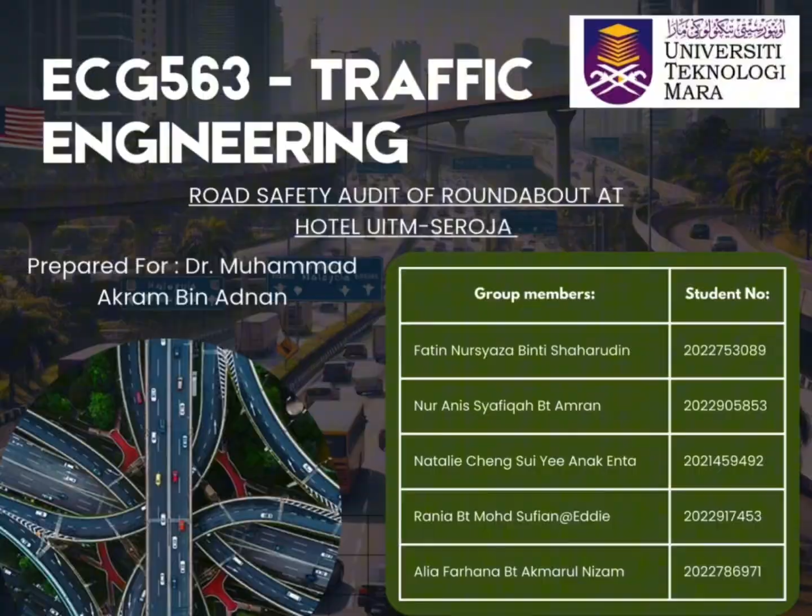Road accidents have been recognized as one of the major problems globally. They have significant impacts on society, the economy, and the progress of a country. Accidents often occur due to traffic conflicts between vehicles, causing delays and congestion.

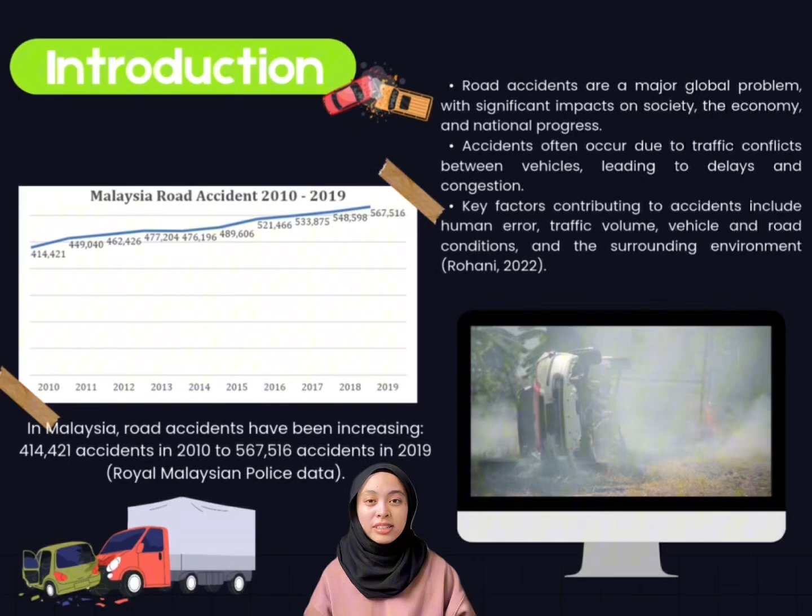According to the research paper entitled Road Traffic Accidents in Malaysia Trends by Rohani Kamaruddin, factors such as human error, traffic volume, vehicle and road conditions, and the surrounding environment play a key role in driving behavior, which can contribute to accidents. In Malaysia, the number of road accidents has been steadily increasing, and data from the Royal Malaysian Police (RMP) shows a rise from 414,421 accidents in 2010 to 567,516 in 2019, as shown in the graph.

Crashes at roundabouts are a significant issue due to factors such as poor design, insufficient traffic control, and high traffic conflicts. The lack of proper traffic management often leads to severe accidents and injuries at this location. For example, an incident from the research paper written by Nurliana Omar entitled Accident Analysis and Highway Safety at Simpang Rantai in 2014 ranked it first for road accidents in Malaysia.

This unsignalized intersection with the roundabout experienced frequent traffic conflicts, and the absence of adequate traffic control measures resulted in numerous crashes. The second case was in Iskandar Putri, Johor in 2023, where a 41-year-old man was killed when his sports car skidded and crashed at a roundabout.

Next, in Batu Caves, Selangor in 2023, a lorry collided with 11 cars and a motorcycle at a roundabout, injuring 3 people. And the last one, in Shah Alam, Selangor during 2018, a traffic accident at the roundabout near UiTM Shah Alam main gate involved a dump truck that appeared to have lost control and overturned, damaging nearby structures including a signboard and part of the landscape.

Research by the Malaysian Institute of Road Safety Research (MIROS) highlights that roundabouts can be especially dangerous due to unclear signs, poor design, and traffic management issues. These cases demonstrate the critical need for better design, traffic control, and management at roundabouts to reduce crashes and improve safety. Hence, this is why we need to conduct a road safety audit to identify potential hazards and implement preventive measures.

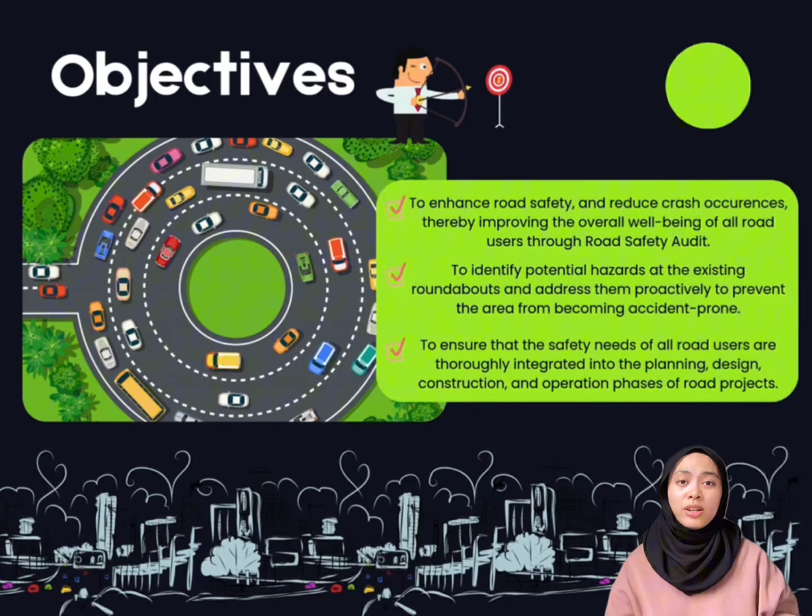My part of the road safety audit focuses on the geometry layout located near UiTM, between Hotel UiTM and Seroja area. This roundabout is designed with the following key components.

The entry and exit radius are critical for controlling vehicle speed at approach and departure points. The width allows for safe vehicular maneuvering around the central islands.

In addition to its vehicular design, this roundabout also incorporates several pedestrian-friendly and safety features. We can clearly see pedestrian walkways, rumble strips, splitter islands, and aprons. This geometry layout ensures that the roundabout is functional for both vehicles and pedestrians. However, during this audit, we'll examine if these features are performing optimally and if there's any room for safety improvement.

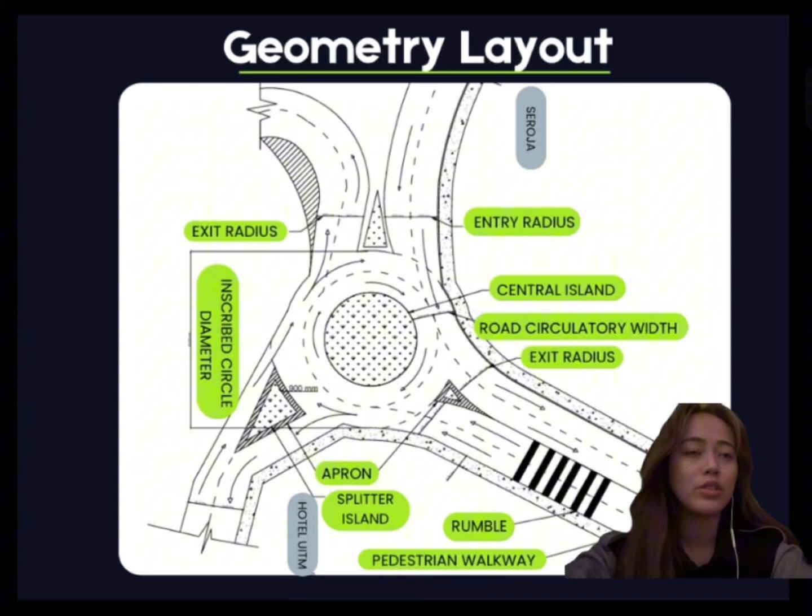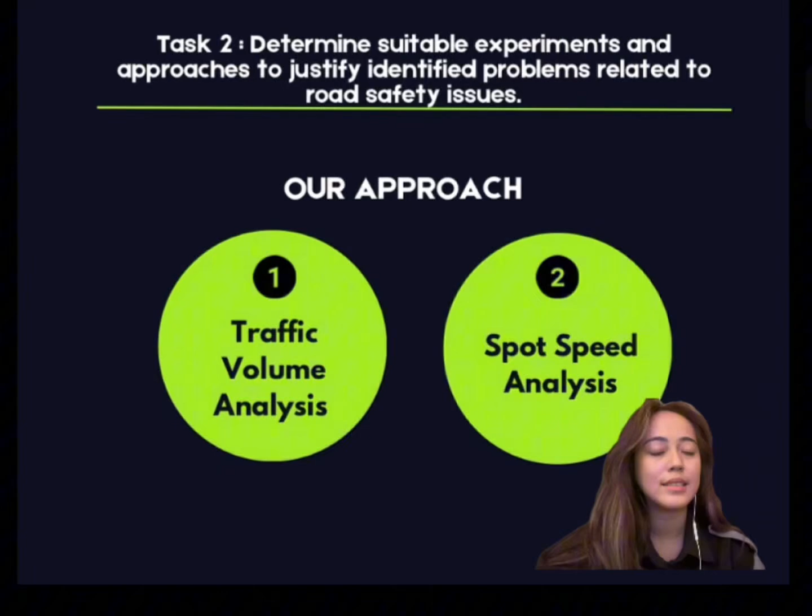Task 2 is to determine suitable experiments and approaches to justify identified problems related to road safety issues. Our approaches to this are, first, traffic volume analysis, and second, spot speed analysis. The first approach is traffic volume analysis.

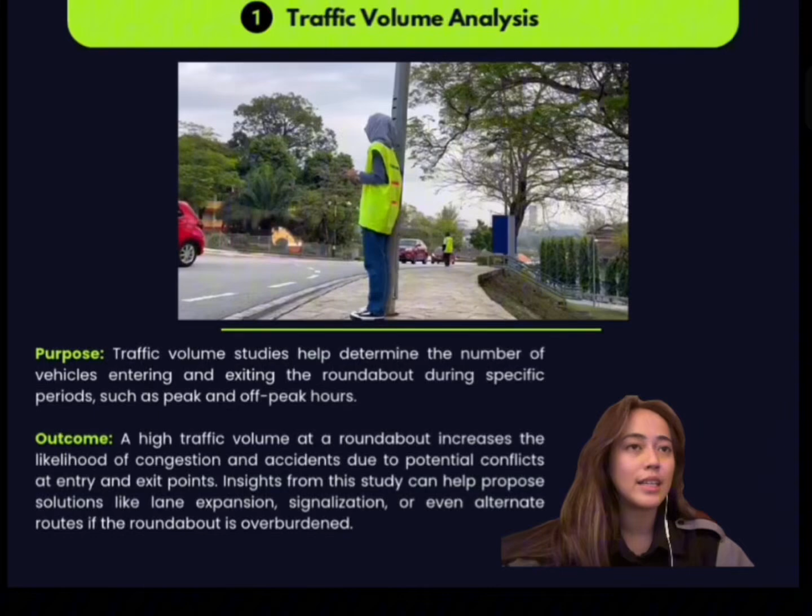So the purpose of this is to help determine the number of vehicles entering and exiting the roundabout during specific periods, off-peak and peak hours. Insights from these studies can help propose solutions like lane expansion, signalization, or alternate routes if the roundabout is overburdened.

Next is our spot speed analysis. This spot speed study captures the speeds at which vehicles approach, navigate, and exit the roundabout. The outcome of this is to understand speed patterns, aiding in recommending interventions like speed bumps, warning signs, and recalibrated design geometry to control vehicle speeds effectively.

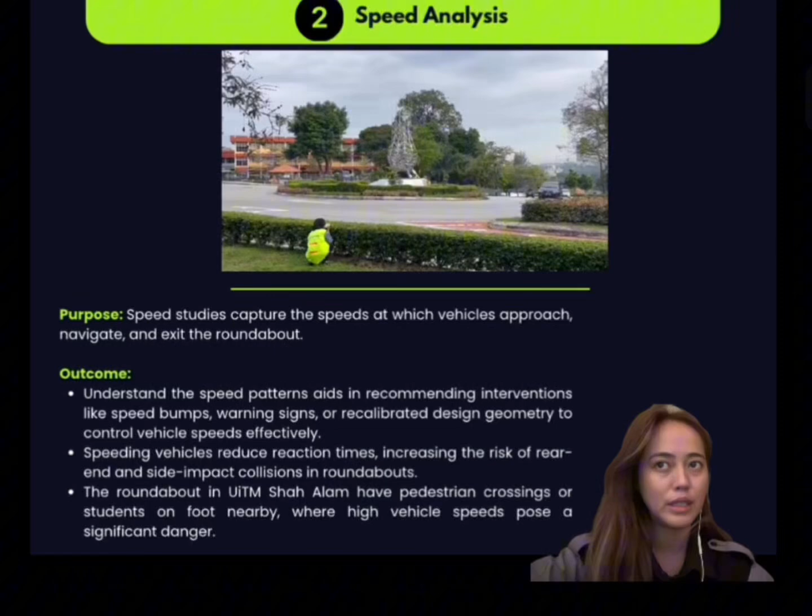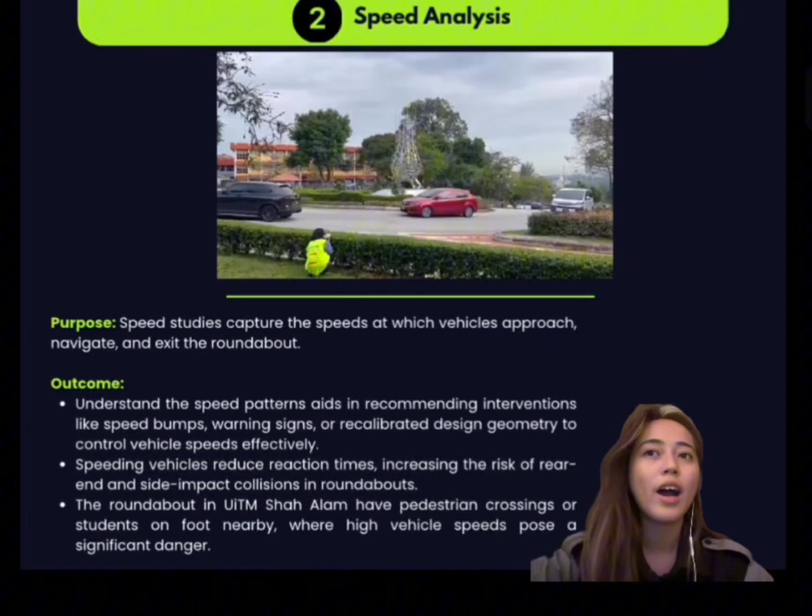Speeding vehicles reduce reaction times, increasing the risk of rear-end and side impact collisions in roundabouts. The roundabout in UiTM Shah Alam has pedestrian crossings and students on foot nearby, where high vehicle speeds pose a significant danger.

Good day everyone, my name is Fatin Nursyaza and today I'll be presenting on the topic of traffic volume analysis.

In this study, we utilized several apparatus to conduct the analysis effectively. This included a mechanical hand counter to record vehicles entering and exiting the roundabout, a digital distance measuring wheel roller to measure the dimensions of the roundabout, and a digital stopwatch to monitor timing in 5-minute intervals over a duration of 1 hour.

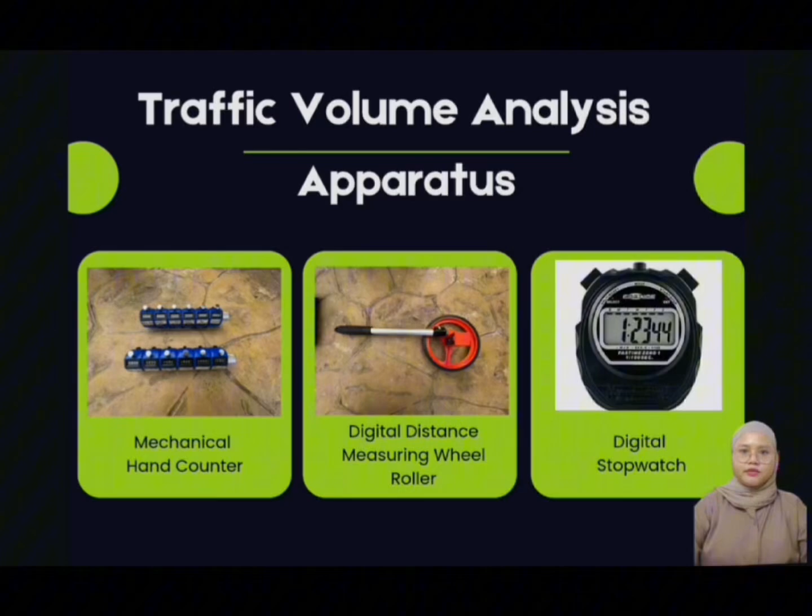The experiment was conducted at the roundabout near Kolej Seroja, UiTM Shah Alam. First, the dimensions of the intersection were measured, followed by labeling the direction of vehicle movement at the roundabout as D1, D2, D3, D4, D5, and D6.

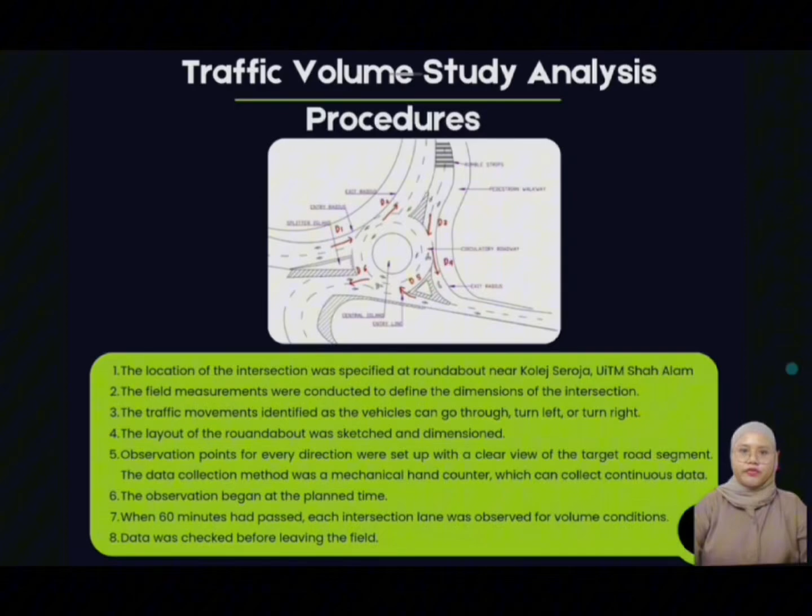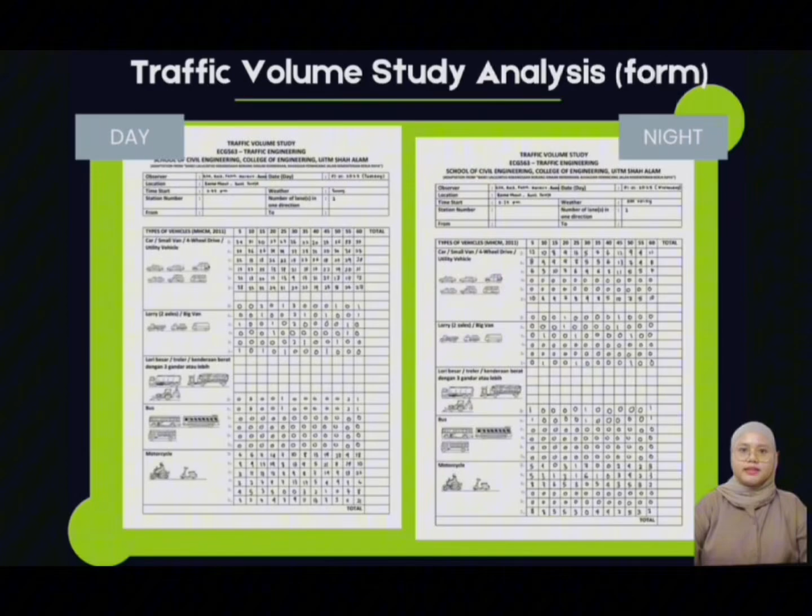Observation points were carefully set out for each direction to ensure a clear view of the designated road segments. Each direction was observed for a total duration of 60 minutes and traffic volume conditions were recorded. The data collection form was structured to differentiate between daytime and nighttime data, with the left-hand column presenting daytime observation and the right-hand column documenting nighttime observation.

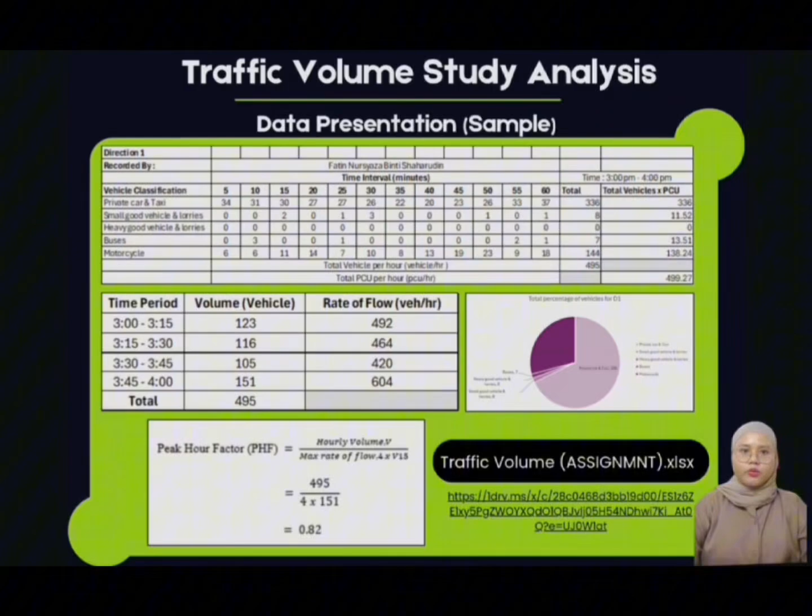Let us now move on to the presentation of the collected data. This slide displays a sample of the data collected during the day during the study. The complete data set along with calculations can be accessed via the provided link. The summarized data derived from the raw observation is presented here.

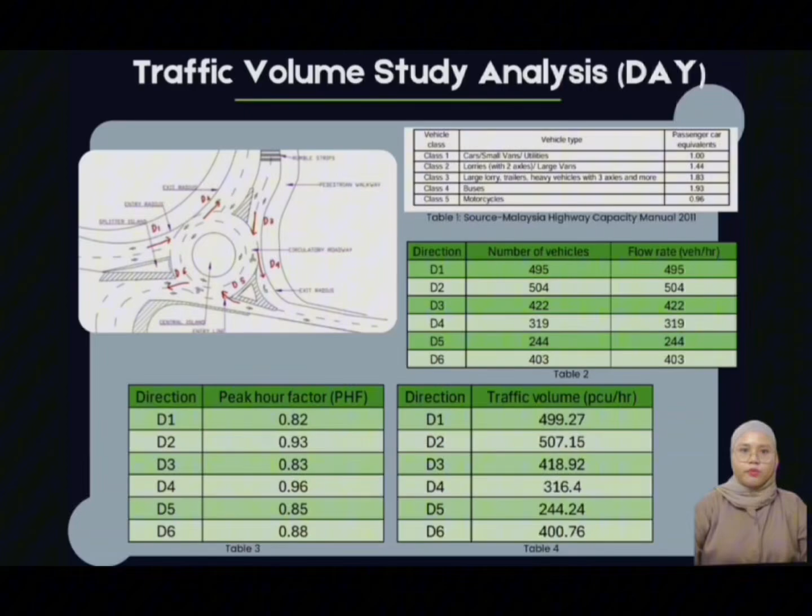Next, we analyze the differences between daytime and nighttime data. The flow rate during nighttime showed a significant reduction compared to daytime, primarily because most people had already returned home and offices were closed during the night.

It is worth noting that no data was recorded for directions D4 and D5 at night, as these roads operate only from 7 a.m. to 7 p.m. Similarly, the traffic volume during the night was significantly lower than during the day.

Lastly, let us examine the PHF comparison between daytime and nighttime data. Interestingly, the PHF value did not exhibit significant differences between day and night. As previously mentioned, the PHF indicates the severity of congestion during peak times.

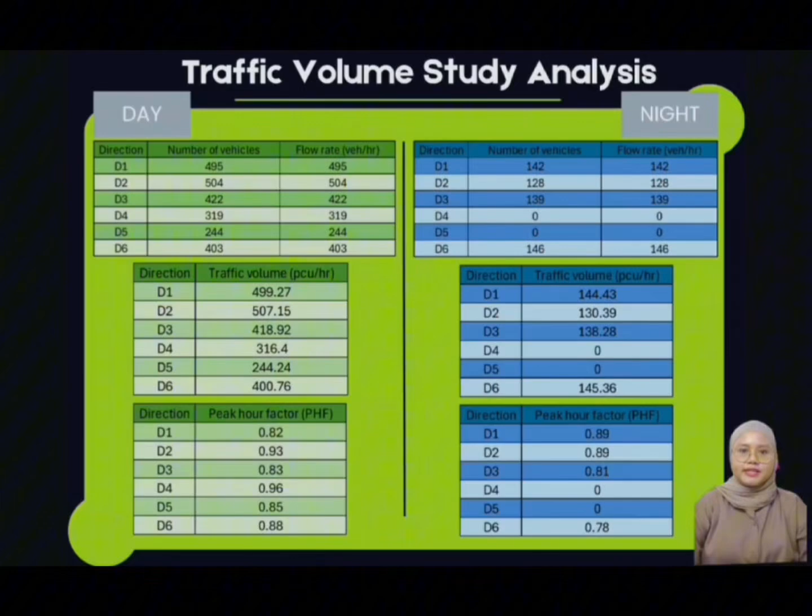The analysis revealed that the traffic flow at the roundabout was evenly distributed throughout the day and night. This consistency is reflected in the PHF values, which confirm the traffic distribution remains uniform regardless of the time of day. Thank you. Spot speed analysis is a method used in traffic engineering to measure and analyze the speed of vehicles passing a specific point on a road.

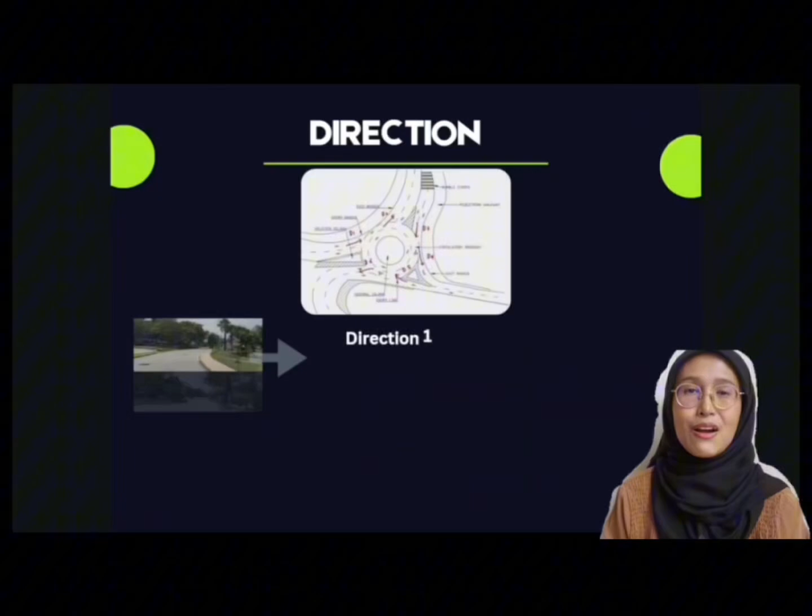For this study, we collected data for 1 hour during the day and night at 3 directions. Firstly, we collected the speeds of 100 vehicles on a road using a laser gun.

The data range from 10 km per hour to 50 km per hour. For better analysis, we group these speeds into bins such as 15 to 19 km per hour and so on. These bins allow us to see how the speeds are distributed.

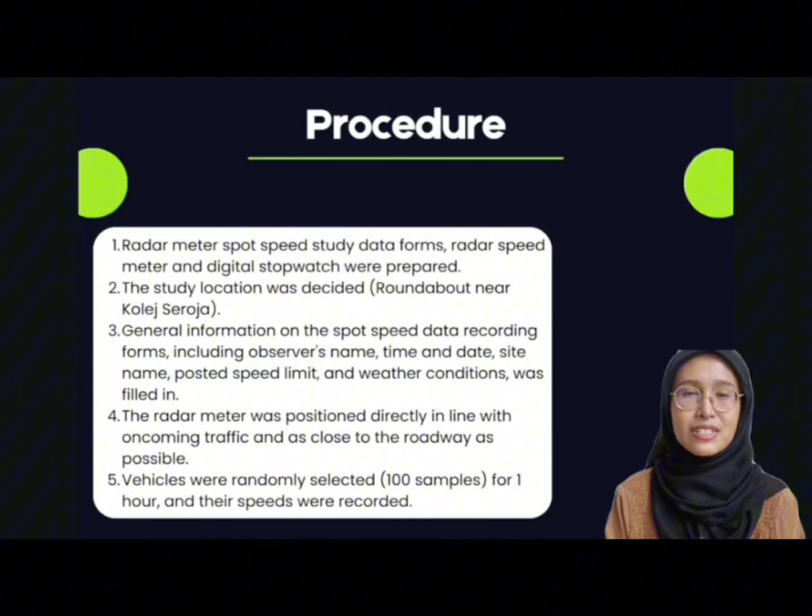From this graph, we can immediately identify speed patterns and spot if there are any outliers, such as drivers going significantly faster or slower than the rest.

By combining these three graphs, we can gain a deeper understanding of driver behavior and use the insights to improve road safety and efficiency.

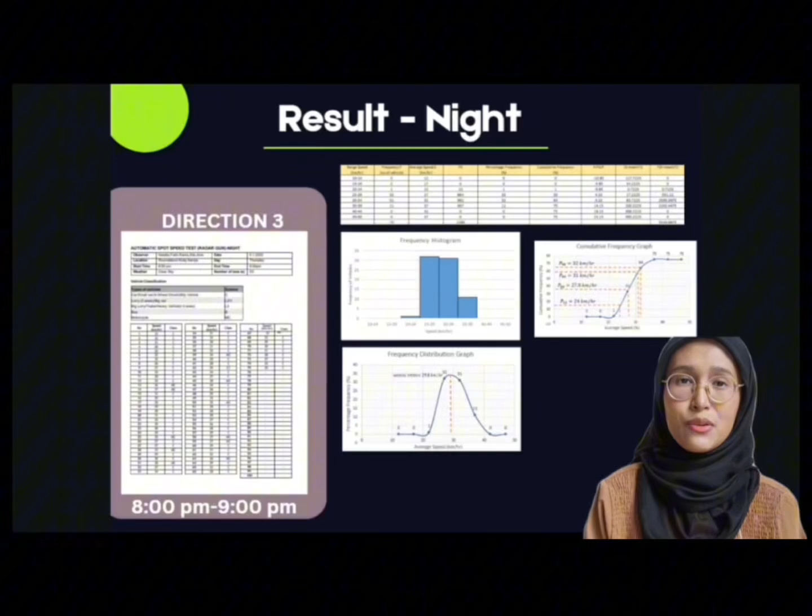The data from direction 3 and 5 also use the same concept. Lastly is the data during the night. After 1 hour, we can conclude that the number of vehicles coming from UiTM main gate decreased and there is no vehicle from direction 5. It is because the most users for that road are the workers.

Next is the road safety elements, issues and mitigations. The first issue is speeding, which leads to risk for vehicles, pedestrians and cyclists, as high speeds increase the possibility of accidents.

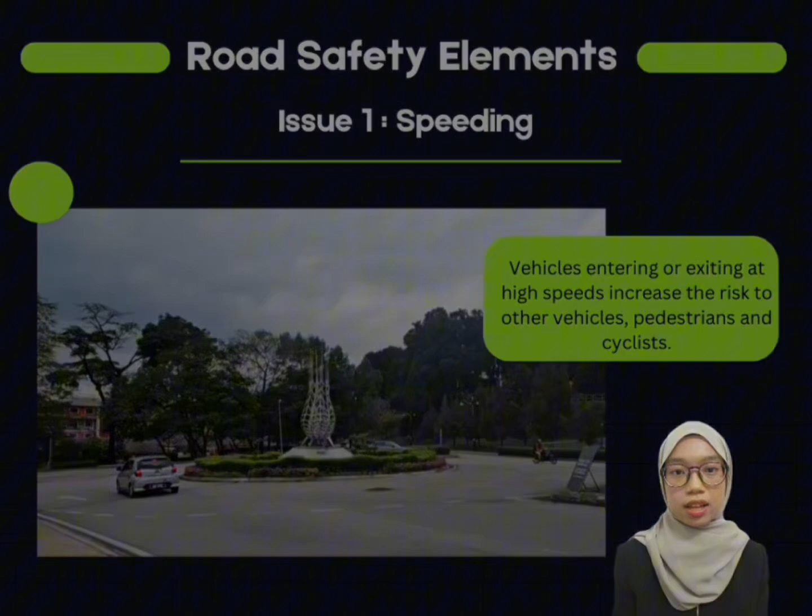To address this, rumble strips can be installed before entry points to alert the drivers to slow down. Also, speed cameras should be used to enforce on the driver.

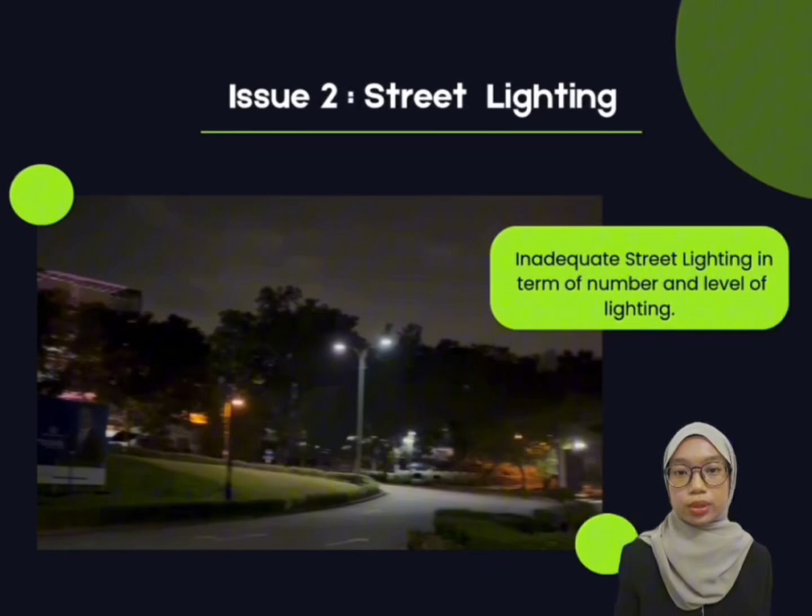The second issue is street lighting. Inadequate street lighting can contribute to accidents, particularly during night time. As you can see from the video, there is a dark spot area, especially from Kolej Seroja to the UiTM main gate.

This can be mitigated by installing bright LED street lights around critical areas like roundabouts and ensuring even lighting to eliminate dark spots.

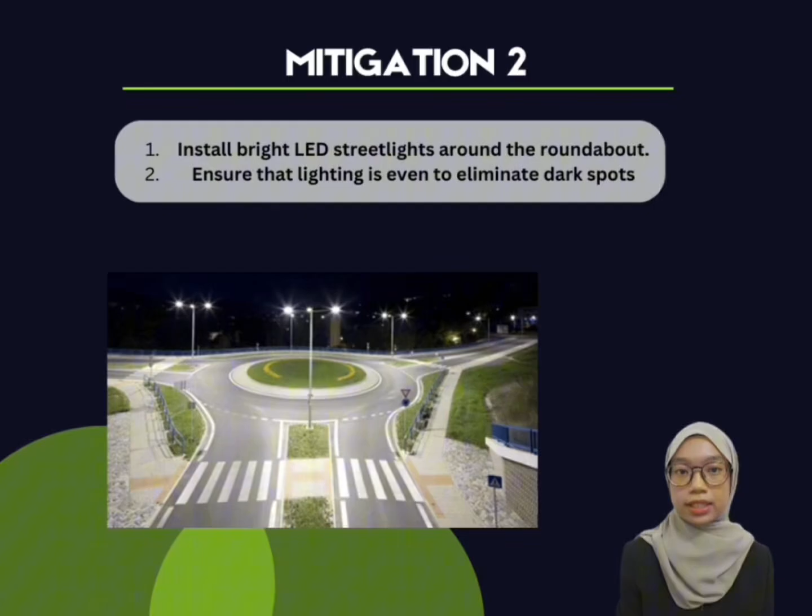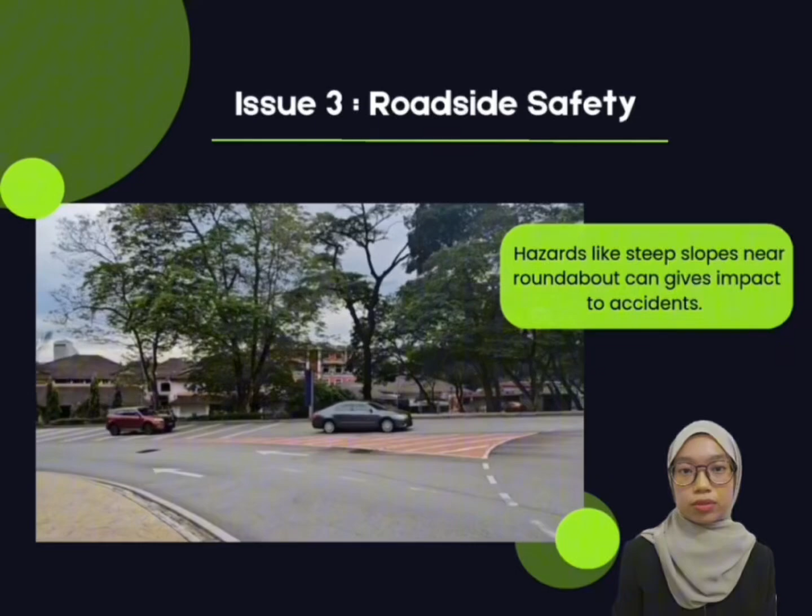Roadside safety is another concern, with steep slopes near the roundabout which can be particularly dangerous. These steep slopes create a risk for vehicles losing control and veering off the roadway.

To address this, the recommended mitigation measure is to install crash barriers or guardrails. These safety features act as a physical buffer, preventing vehicles from leaving the roadway.

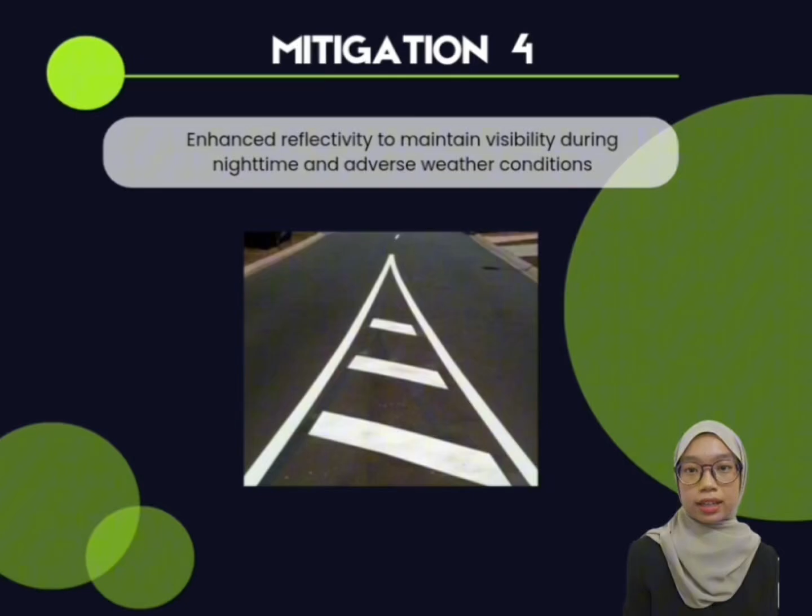Visibility issues due to poor road markings at night were also identified. Enhanced reflectivity of road markings can improve visibility during nighttime and adverse weather, providing better guidance to drivers.

Finally, uncovered drains on the road surface, especially hazardous to motorcycles, present a significant safety risk. Bumps will occur when any of the vehicles are passing by the uncovered drains.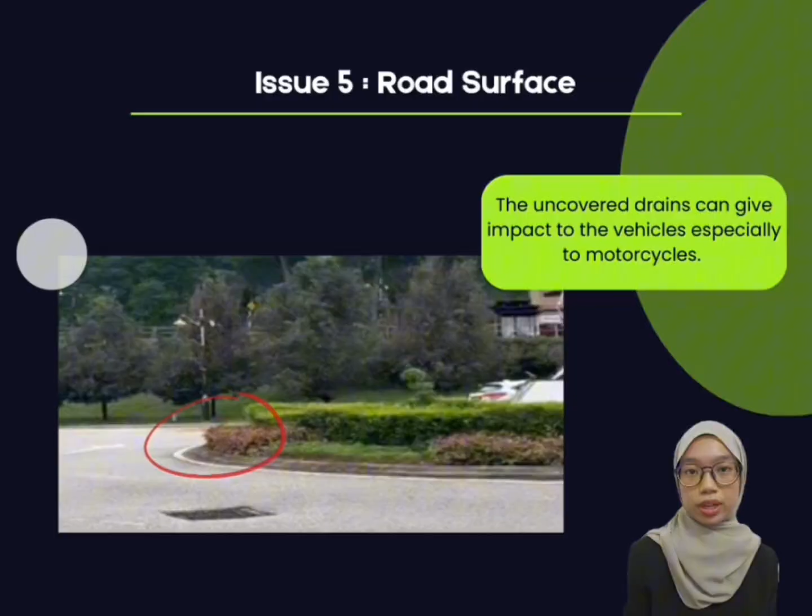This can be mitigated by ensuring the grates are flush with the road surface and maintaining road condition to prevent unnecessary hazards. All these measures aim to create a safer road environment for all users.

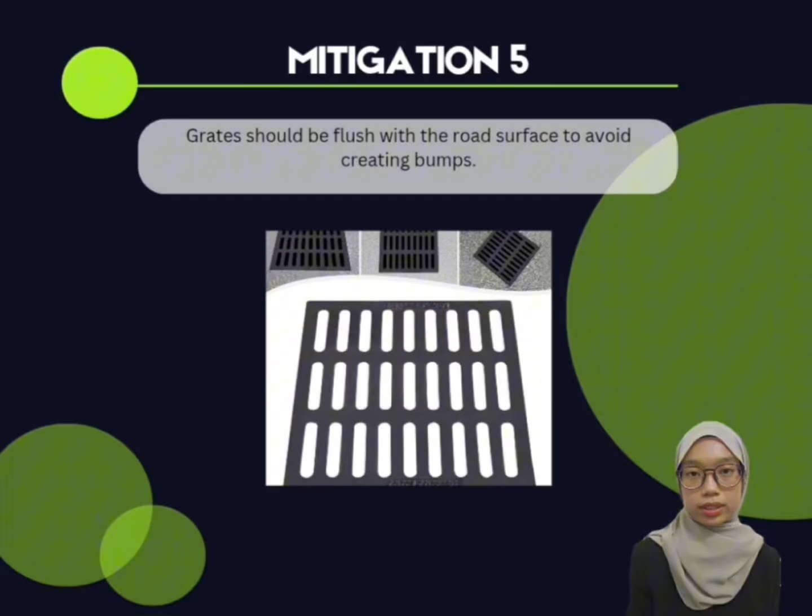In conclusion, the road safety audit conducted at the Hotel UiTM Seroja roundabout identified several critical issues, including high traffic volume, speeding, poor lighting and unsafe road conditions. Traffic volume analysis revealed congestion and accident risk at entry and exit points, especially during peak hours.

Speed analysis showed that vehicles entering and exiting the roundabout at high speeds increased the likelihood of collisions, particularly near pedestrian crossings. Additionally, inadequate lighting, poor road marking, uncovered drains, and steep roadside slopes were found to compromise the safety of all road users.

To address these issues, several mitigation measures were proposed. These include installing rumble strips, speed limit signs, and speed cameras to manage speeding, and upgrading streetlights to bright LED fixtures.

Enhancing road markings for improved visibility, and installing crash barriers, guardrails, and flush grates to enhance surface and structural safety. Implementing these solutions is expected to significantly reduce accidents, improve road user safety, and contribute to the development of safer transportation infrastructure in Malaysia.